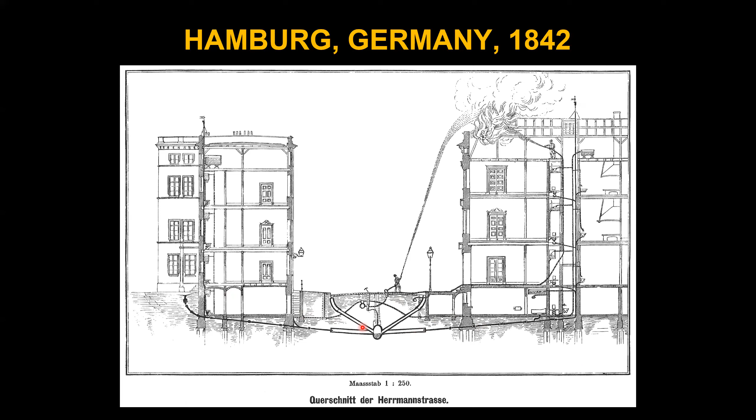And this modern sewer system was then spread everywhere in the world, especially by means of European engineers who traveled everywhere across Europe first, but also in Asia, in Africa, in Australia, and they disseminated this approach to solve the wastewater problems and to manage stormwater in cities. And the key concept was based on 3 ideas. Connect. So the idea is to connect as much as possible all the buildings, all the impervious surfaces to this collecting system, to evacuate, the second point, the stormwater, as fast as possible, jointly with the wastewater in case of a combined system, or separately to the nearest available surface water course, for example, if you have a separate system.

And in that time also, there was no reason to treat. The main objective was evacuate to avoid disease, which were attributed to the miasma. They were working with this miasma theory, considering that people were sick because of small living particles in the air, in the atmosphere. And so the idea was to evacuate the water as fast as possible. So connect, evacuate, don't treat.

Very quickly, two concepts emerged. The separate system, where you have two separate collecting systems, one for stormwater with direct discharge into the rivers or lakes or ponds or in the sea if you are on the shore, and another collecting system for wastewater. In the early beginnings, for the first, let's say, 50, 60 years, there was no treatment. So the wastewater was discharged directly into the rivers. And after some decades, when they observed that rivers were more and more seriously polluted, they decided to introduce wastewater treatment plants. But it was not like that in the early beginnings.

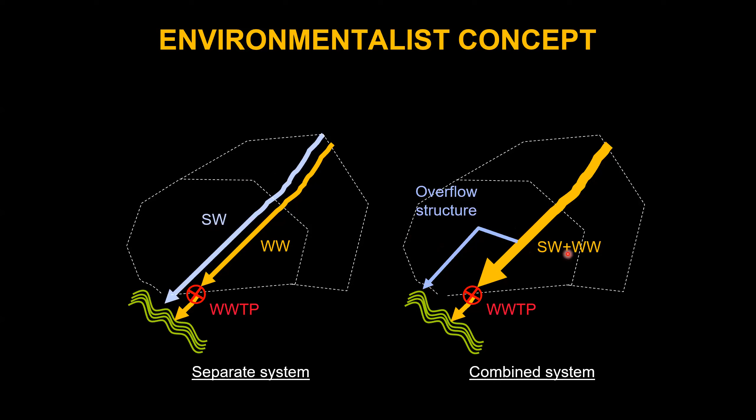And it was assumed that this water was contaminated by the wastewater, but that the overflow occurred only during high flows when the wastewater was sufficiently diluted to have no or very limited impact on the rivers. Both hypotheses were wrong. The first one is that stormwater was not polluted, so it didn't require treatment. And the second one, assuming that everything was sufficiently diluted to be negligible, was also wrong. But they started like that with this stormwater management, and it was the case for decades and decades.

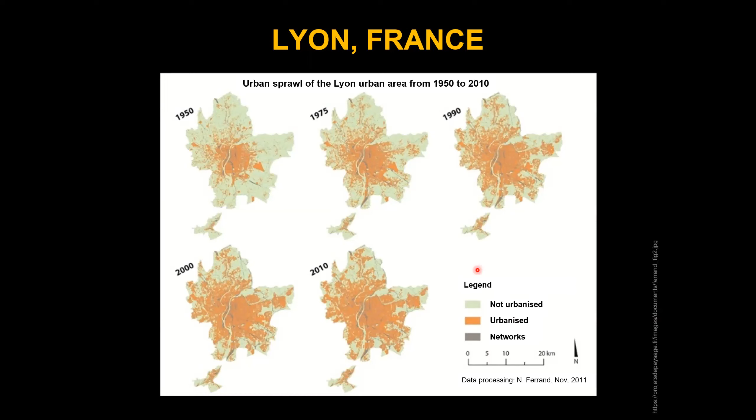And if you have in mind that in the historical part here in the city center, like in many other European cities, they have built a combined sewer system. And progressively, with the extension of urbanization, with the urban sprawl, they have connected more and more water to the system. And something which was sufficiently designed at the beginning became too small. So they needed to

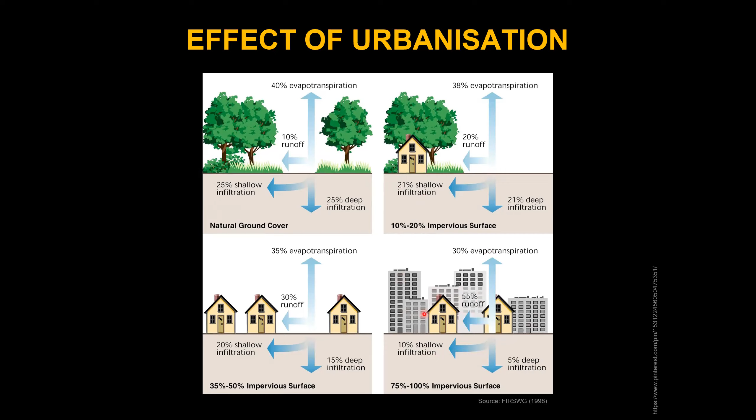So this trend was combined with the extension of urbanization. So it's not simply that you urbanize more and more on the same area, but also that the area you urbanize is growing. And the consequence is always larger and larger pipes. Because one of the traditional engineering approaches is, if I can say it like that, if you don't solve the problem with a big pipe, you will solve it with a larger pipe. So the trend was just increasing the size of the pipes.

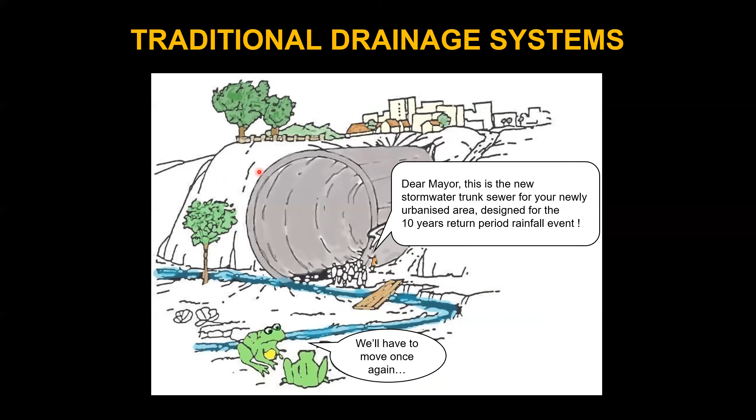So I like this drawing, but it's not only a drawing, no. You have this type of big pipe in the US, but in other cities worldwide. So you build larger and larger and gigantic infrastructures to evacuate stormwater. So it's no longer a proper solution, because the gigantic infrastructures have also a gigantic cost and drawbacks at the end.

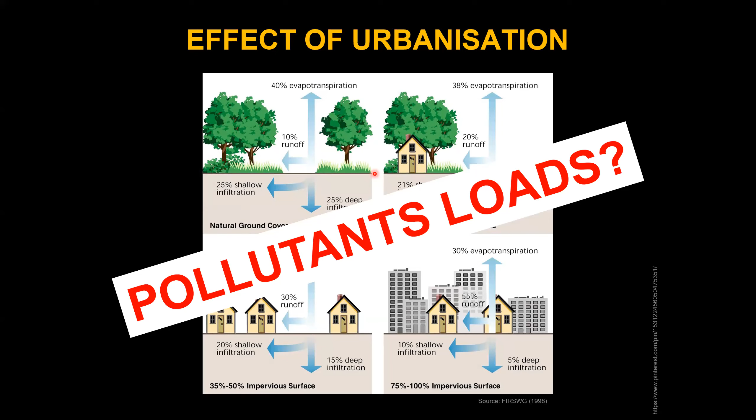The other aspect is it's not only a question of water, it's also a question of pollutant loads. Historically, in the 60s, 70s of the 20th century, people started to monitor the traditional pollutants like BOD, COD, total suspended solids, nitrogen, phosphorus, just to compare with wastewater. But progressively, they realized that it's not only these pollutants which are transported in stormwater, but also heavy metals, hydrocarbons, and more and more during the last 20 years, a big focus is given on micropollutants or emerging pollutants. Okay, the pollutants usually are not emerging, it's our interest in them which is emerging. So we have to deal also with pollutant loads, which have been neglected for decades, which forces us to revisit our approach.

And these sources of pollutants are numerous in cities. First, some of the pollutants may arrive directly with the raindrops themselves. They transport some dissolved and very fine particles named aerosols, which are the support of several pollutants. You have the dry atmospheric deposition, which occurs between storm events during the dry periods, coming from all the local and sometimes very distant emissions of particles, aerosols, by industry, by houses, by traffic.

You have the erosion of the soil in the cities, on the streets. You have the erosion of the cars, of the particles they transport, they emit. You have erosion of the road surfaces. You have the roof material, which is eroded and also transports some pollutants. You have some organic matter coming from leaves, from animal feces, from different types of waste that inhabitants are abandoning on urban surfaces. Even if they are not systematically directly connected to the sewer system, you have also some parks, gardens, natural soils, which may contribute to the flux of water and pollutant loads during very significant storm events.

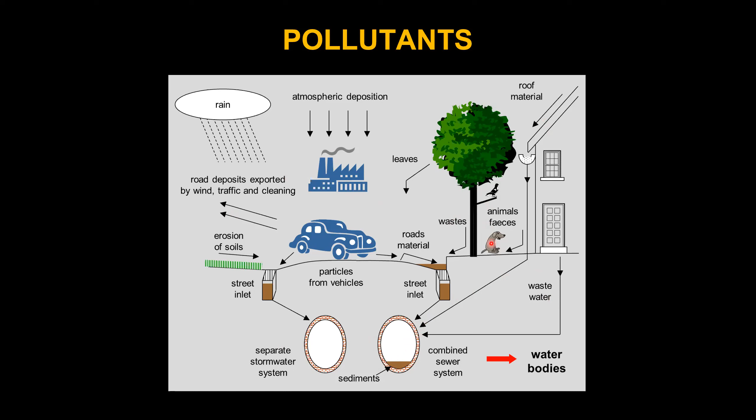And all these pollutants are transferred through the street inlets to the pipe systems, which are either separate or combined sewer systems. These two systems transfer in the last phase their pollutants to water bodies, rivers, lakes, and other recipients. In addition, we have also a lot of problems related to sediments, which have been relatively well documented in combined sewer systems, which are resuspended during storm events, and which make it difficult to close mass balances of pollutants when you try to make a mass balance at a catchment or a city scale. So this is what we know today and what we have to deal with.

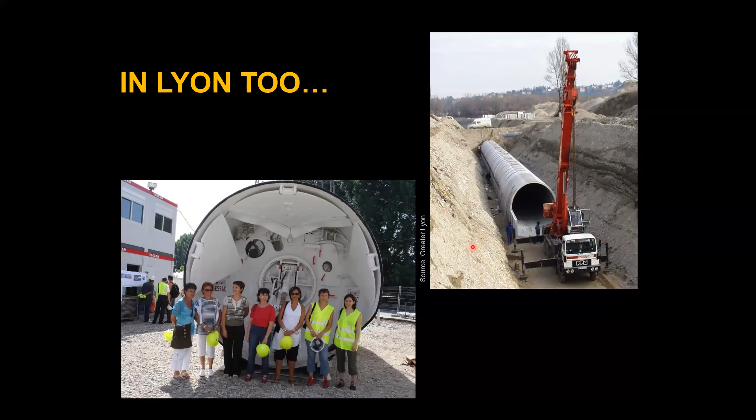Of course, they were like many other cities. So in Lyon too, they had big pipes, big tunnels, even the big ones you build with tunnel boring machines. So the cost of such infrastructures is very expensive per kilometer. So they had to do that, like many other cities, and they pay a lot of investment to make this infrastructure.

And the city center, this is near the main railway station. You can see that Lyon is not really famous for parks and gardens. You can see some trees and parks, but the fraction of the area of the city covered by these parks is rather limited. So they have a very dense mineral city center, obviously with a reduced infiltration capacity.

And over the last 20 years, the heat island effect increased dramatically. And for example, 2 years ago in July, we reached more than 41 degrees in the city center. So you have the typical combination of urbanization, loss of infiltration, heat island effect, and all related problems that you have to deal with. But Lyon is not only like that, because as I said, on the east side, they had to manage the stormwater in a different way.

At that time, it was not named nature-based solution, but the philosophy was a little bit similar. And in the French technical vocabulary, it was named alternative techniques, which means an alternative to pipe systems. So abandon the systematic collection and evacuation of stormwater, but try to intercept and infiltrate locally. And this is what they built in the 70s.

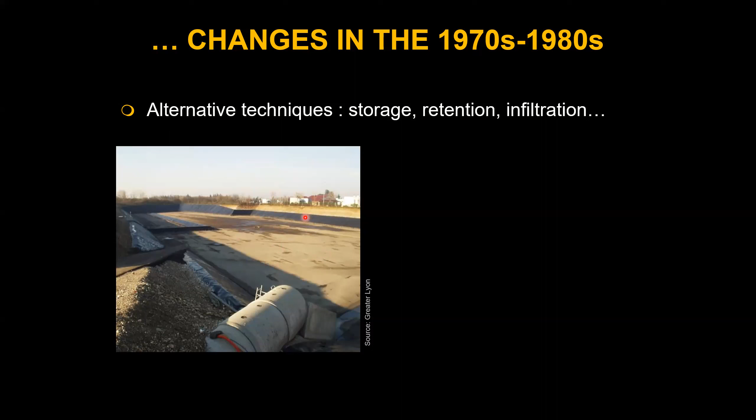In the 70s, it became very popular. This facility, you can see on this figure, the bottom area is 1 hectare, so it's a quite large unit. But of course, it was, I would say, designed only by engineers. No? Straight lines, not very nice looking facility.

And progressively, at the turn of the 80s, they created something more attractive. They replaced this type of bottom with this quite horrible black plastic sheet all around by something with grass, stones, and you can infiltrate the water there. They introduced, however, fences because it was considered as a closed space with no public access, and it was considered as a technical object for water specialists. But it was the first attempt to have something more nice looking and more integrated in the landscape.

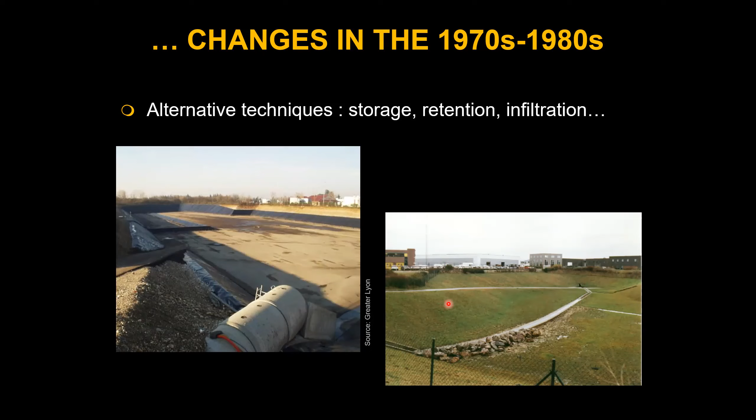However, it was still designed mainly by engineers, not by landscapers. And over the last 50 years, they considered progressively that stormwater was no longer an urban nuisance, but became a valuable resource. I will explain later on why they were working in that direction. Initially, they started to deal only with quantity, so how to manage cubic meters per second and the volumes of cubic meters. And they introduced progressively water quality issues in their thinking, in their design, and in the management.

And progressively also they moved from a pure hydrological and hydraulic approach to a multi-purpose approach, because any square meter in a dense city is quite expensive. So if you use it only for stormwater, it may be considered as a very expensive approach, and you lose your space, which is used only a couple of days per year during big events.

And the most important aspect also was that they moved from a technical separate issue. Stormwater management was only in the hands of water specialists. And the water specialists were invited at the end of the urban projects of city planning. Okay, we have designed the city or the future part of the city, and please, can you come and make the stormwater management in this area?

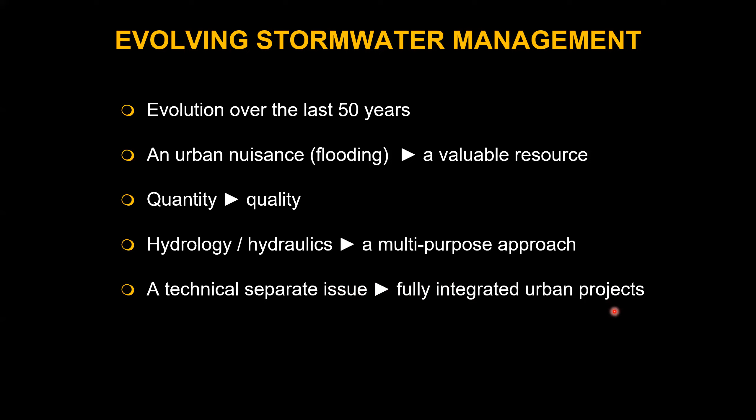And they moved from this, I would say, separate last moment approach to more fully integrated urban projects, when the stormwater specialists are involved since the early beginnings to contribute to the design, the concept to be applied in a given new urban area, or in an area where you retrofit the existing urbanization.

One of the consequences was that stormwater professionals were acting, interacting, and collaborating more and more with other people, with their water colleagues first. Because when you refill, for example, the aquifer with infiltrated stormwater, you have some stakes to deal with about water resources, drinking water production. You have to manage in a coherent way your collecting systems and your wastewater treatment plants. So they had to discuss more with their water colleagues.

They had also to discuss much more with landscapers, with gardeners, with architects, city planners, also with public transport and road specialists. If you have something like porous pavements and you make your road with this type of pavement, you have to interact with people in charge of roads and public transport. You also have to work with people in charge of solid waste. And I will comment later on about these issues.

So it was a progressive, but really clear and significant transition. And to do that, you need motivated people, because you are doing something which is against the traditional silos of city management. It's never easy, and it's a long lasting process to embark everybody in a coordinated and integrated approach with engineers and technicians from different disciplines.

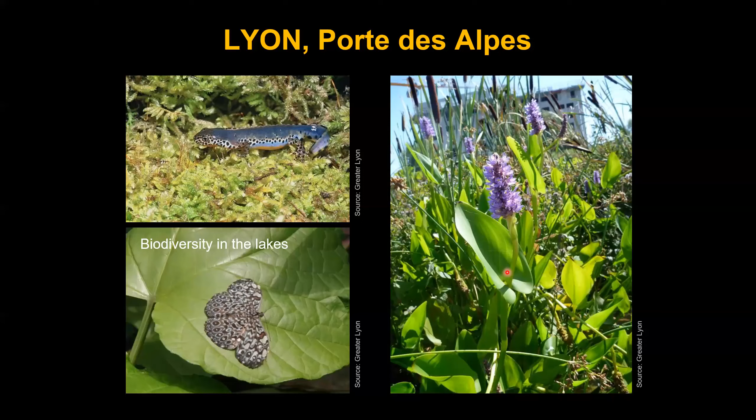But Porte des Alpes was an easy case because it was on the east side of the city when they decided to replace an agricultural area by an urbanized area. So you have lots of space and you have a free area to do what you want.

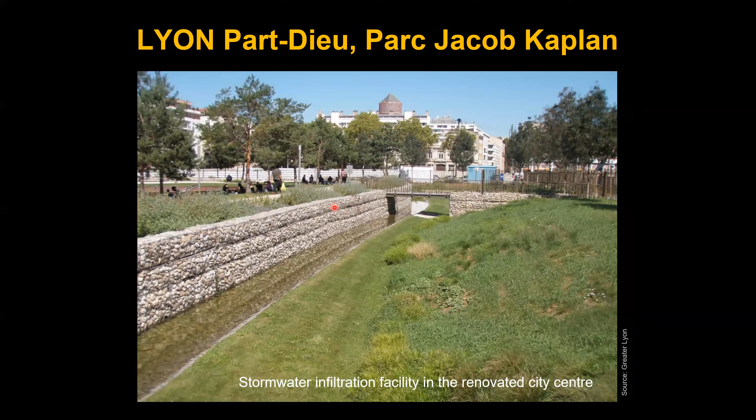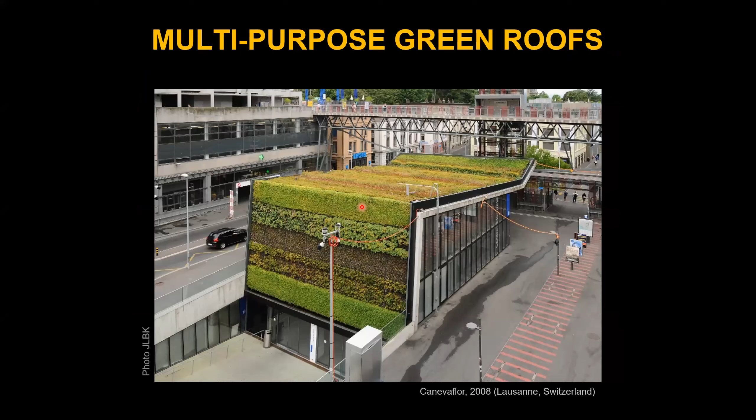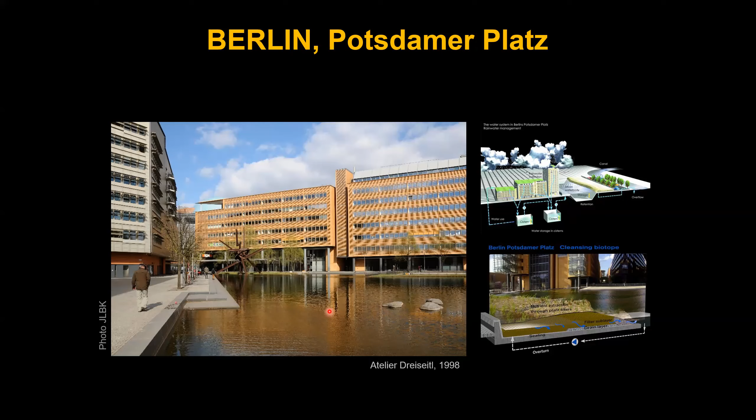And you have also an area of this pond in this part, which contains also some algae and vegetation to do some nutrient uptake and extraction and some filtering effect. So this is quite a mineral environment with water, but however, it's another way to really integrate stormwater management with some natural aspects into a complete project.

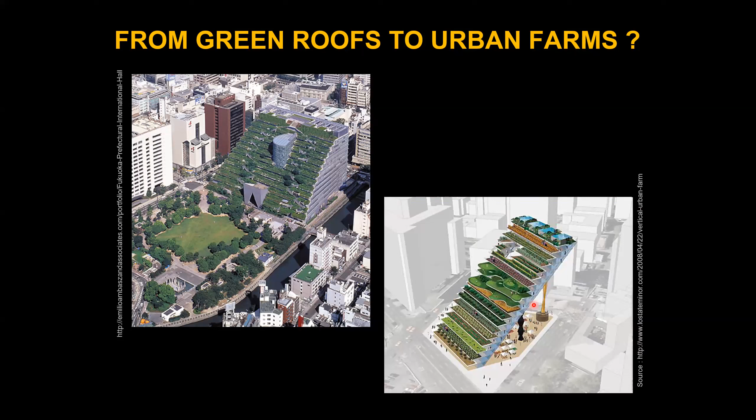And you have this example in Japan, where they created this administrative building, and the challenge was, we need to create a building, but we don't want to lose any square meter of green space. So they had this very unusual shape for the building, but you can extrapolate the ideas to have a kind of urban farm. So I have no time today to discuss all these details, but there are quite interesting ideas to develop the cities of the future.

And today, the paradigm has changed. So we abandon the systematic connection, evacuate and don't treat, by something which is disconnect maybe as much as you can. For example, in some parts of Lyon, it's now forbidden to connect your stormwater to any pipe. So the motto is disconnect your water, infiltrate as close as possible to the source where the rainwater is falling, and treat when and where it is necessary, depending on the pollutant loads you have on a specific area.

And the other approaches are be sustainable, so save, use, reuse, recycle your stormwater, don't evacuate it very quickly to the nearest stream. Be resilient, adapt, modify, retrofit the existing city, and to do that in a more efficient way, you need to collaborate and integrate disciplines.

A few other examples in the city of Lyon. Each opportunity to reduce imperviousness, to add some vegetation, to add possibilities for stormwater infiltration is used. So each square meter has its own value. So each possibility is used. So year after year, the change is minor, but if you have a very long-term strategy, it will really change your city after 30, 40, 50, 60 years.

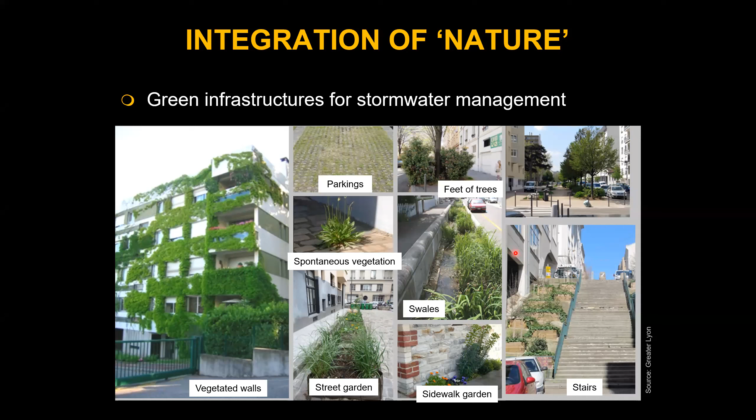So if you want to manage your stormwater with this type of approach, you need also a long-term vision and to be consistent in your policy over decades and not changing every 5 or 6 years, because it's a long-lasting approach. But at the end, it pays.

When I'm speaking about multidisciplinarity, I don't mention only technical aspects, because for decades or 1.5 centuries, the water was left in the hands of water specialists. So people were educated to think about water as a fluid, a means of transport. They were very good in hydrology, hydraulics, calculating flows, volumes, concentrations of pollution. So something mainly based on physics and chemistry.

But water incorporates many other values. Water has a meaning, water has some very strong link with culture, with history, geography, with symbolisms, with modes of life. So if we consider only water as a fluid which is transferred in the city, we lose a lot of its meanings, of its significance, and even the way we consider it is maybe not appropriate.

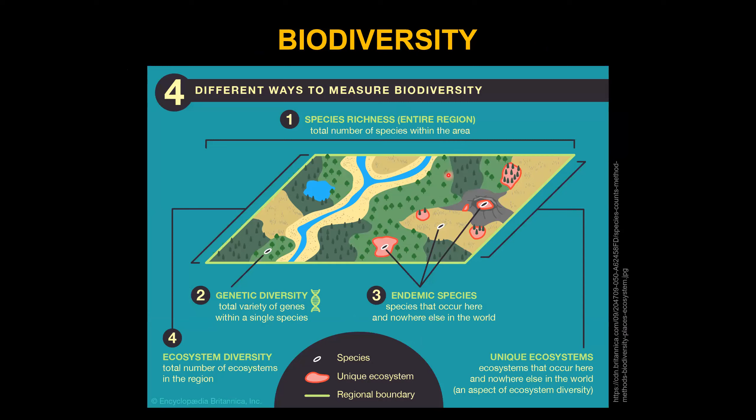More recently, a new consideration emerged. It was biodiversity. So the idea is to maintain and to obtain, if it's possible, a richness of species, of genetic diversity, of endemic species, and having also an ecosystem diversity. And how can we include this in the approaches we have when we design stormwater management in cities? One of the most typical approaches is this blue-green corridor vision.

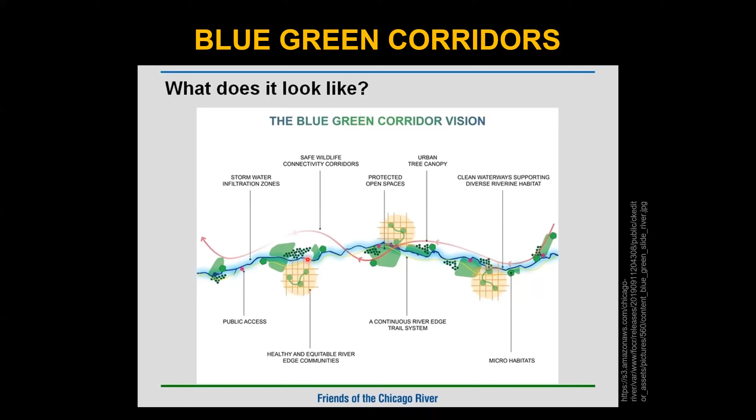So you create some spots, and not only spots, but more important is corridors, where the different species can circulate, move, to create and recreate very frequently the continuity of your ecosystem. And it's a very long-lasting task, of course, and ambition, because you need to reconnect and recreate some continuity which has been very frequently destroyed in the past in the cities.

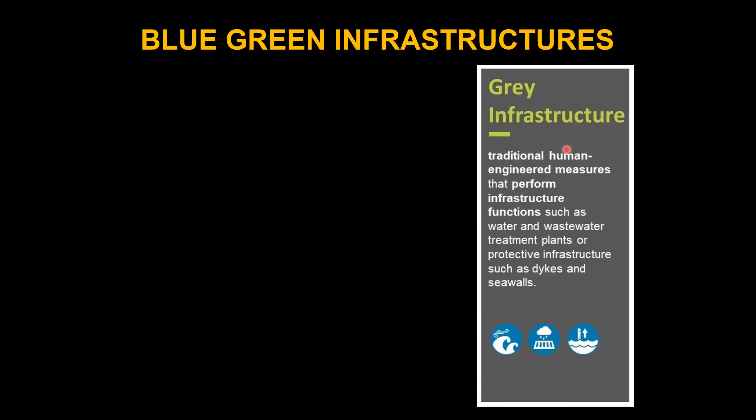And the idea is to move from gray infrastructure, typically pipes and sewage systems, to green infrastructure. And the last step, at the moment at least, is these blue-green infrastructures, where we interconnect networks of natural and semi-natural areas, combining water bodies, green and open spaces, helping to promote and to restore biodiversity in urban environments.

Usually there is a trend to reopen the water courses, to introduce nature in cities, to increase urban ecology, to contribute to the climatic and temperature control in the fight against heat island effects. You combine your stormwater management with architecture. If you go in the direction of urban farms, urban agriculture, you can also link your stormwater management with food production, with energy savings, citizen well-being, public health, and you combine that with society and cultural needs.

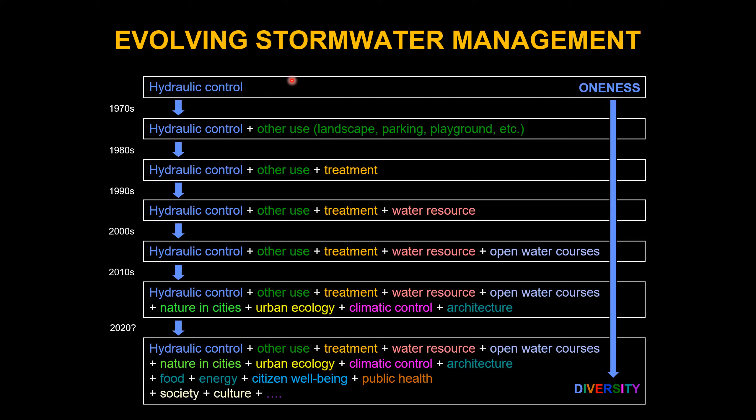And we also, on the same line, move from oneness, only one solution, pipe systems, to a much more diverse approach. But this is not the end of the story. We need to continue to imagine and embed.

And for example, we wrote with many colleagues the IWA principles for water-wise cities. And if you read this short document, it's another vision where you can embed your stormwater and wastewater systems at the city scale and also at the catchment scale, because cities are not islands in the middle of nowhere on the territory, but they are strongly interconnected with the upstream catchment, the downstream catchment, and how to interact also with citizens. And this is how to reconsider the central place of water in cities.

But it's not easy. This is an example of Greater Lyon. Imagine the old system. You have a road, a pipe system under the road. And the pipe is operated by the sewer department. The road is operated by the road department. On the side, you have green, you have trees, you have parks, and this is operated by the Parks and Garden department. And in the past, each department had its own responsibility.

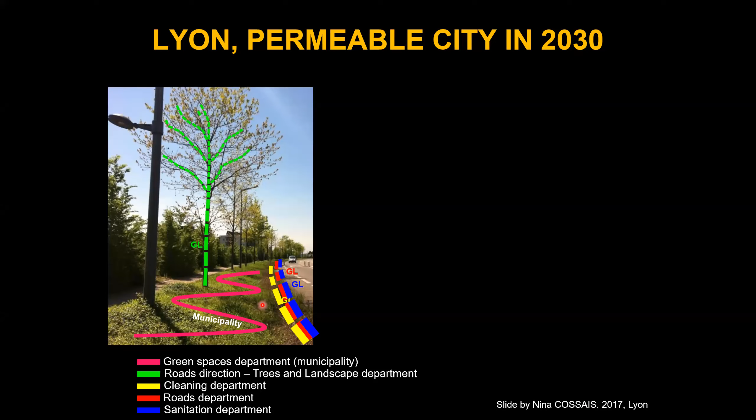And this is a PhD thesis by Nina Cossais, and she investigated these difficulties. And you can observe here, with different colors, the different departments involved, and the responsibilities which were clearly defined in the past are becoming sometimes overlapping or fuzzy, and the city needs to completely redefine the boundaries and the responsibilities of the different technical services when you create new infrastructures which are much more integrated. And it's a long process.

And this is another way when you take a more urban area in the city center, between the solid waste, the road, the water departments. So everything is now becoming more complicated to manage. And you have to deal with that, and you have to plan it in advance, because once your infrastructures have been changed, they need to be operated for decades, and you should anticipate how you will manage your new infrastructures.

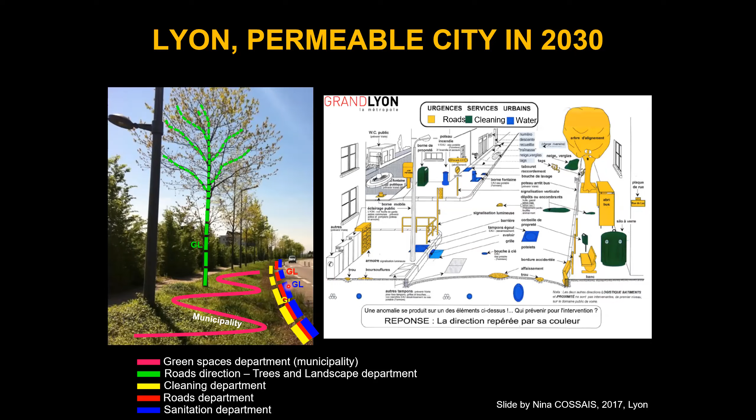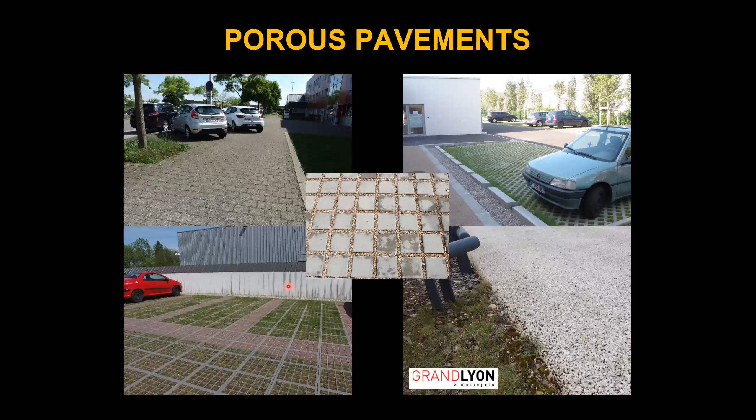And this is what they did in some cases in Lyon, with these porous pavements which are developed. They develop lots of swales and infiltration systems in different places, more or less natural. They develop this type of rain gardens. And one of the most interesting details is the sidewalk. In the past, they were higher than the road.

And now you should invent something which is lower so that the stormwater and the runoff can go into this area. And this is a question of a few centimeters difference in the levels of the streets and the sidewalks, and how the water can run off on the streets, on the surfaces, and reach the places you want them to be infiltrated and used for your trees and vegetation. They reopen watercourses which were hidden in the past, and they create more artificial ponds, like the first examples I have shown in Portland.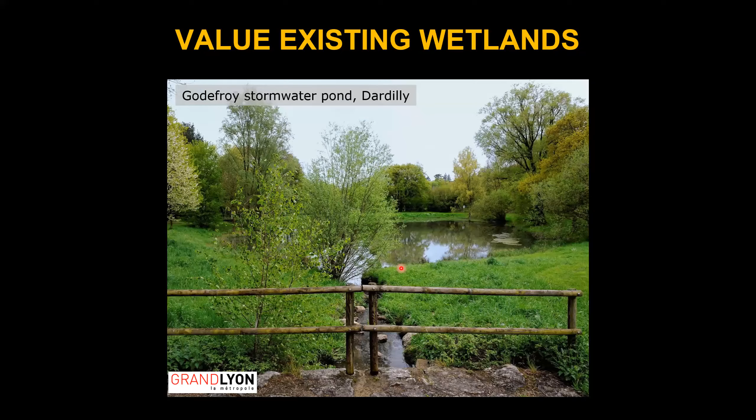And if you use them, you can have a different vision of how to manage your stormwater in cities. And usually NBS, surprisingly for me, is nature-based solution, but the words biomimicry or biomimetism are very rarely used. So maybe we can go one step further and go in that direction. And to conclude my presentation, I'd like to show you a few last slides.

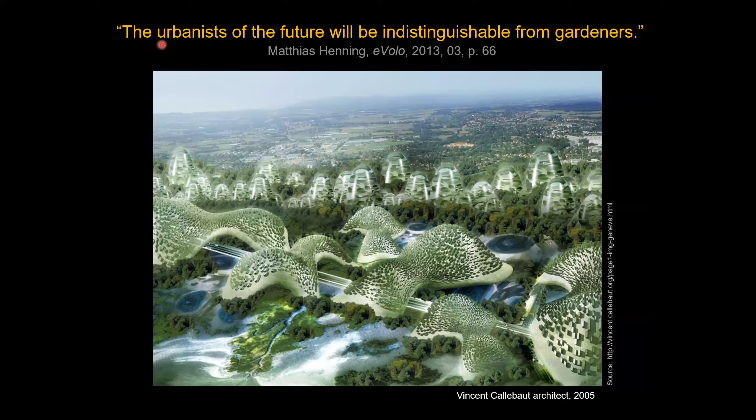And I will conclude my presentation with this last slide. It's a design by Vincent Callebaut, another Belgian architect. It's an extension of Geneva, in Switzerland, on the Rhone River. And what I like is the sentence from another author, that the urbanists of the future will be indistinguishable from gardeners.